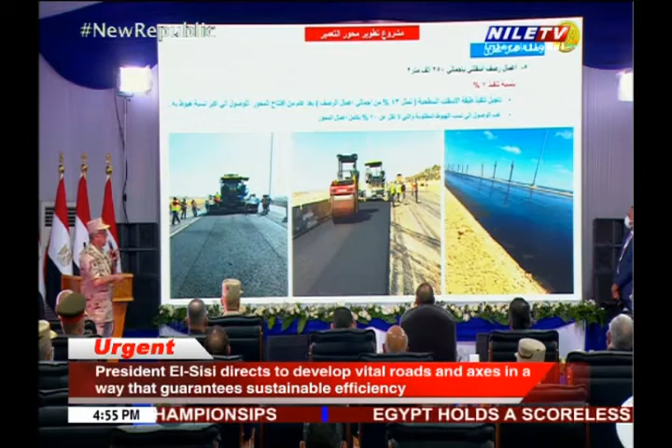For the pavement at a whole of 250,000 square meters, we'll execute 7%. Why only 7%? Because I'm postponing 43% of the surface layer as well as the second layer that is postponed till following the inauguration, one year and a half later.

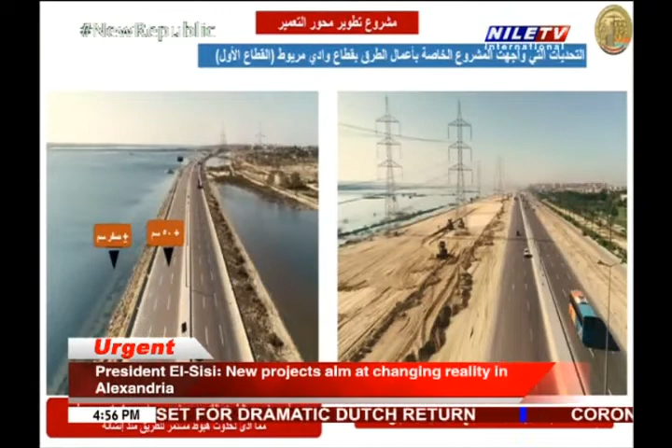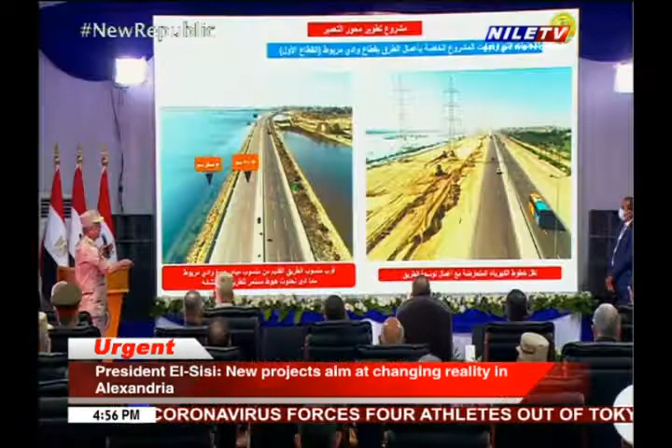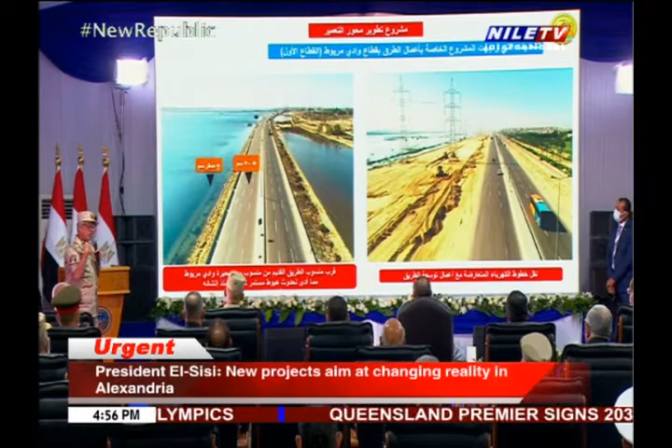50 centimeters of the water volume that would cause a landslide of a year. So each year would have the same problem, but today we've reached 9 lanes and above the surface of water to 3.5 meters, higher than the top of the water. The movement of the water would not affect the road at all.

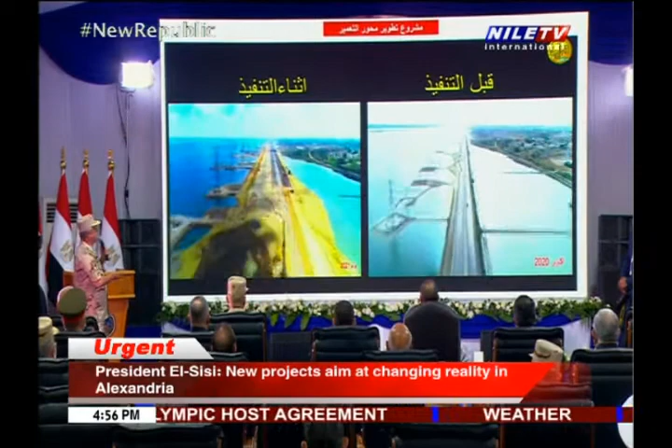Next, this is an execution status of October 2020. At the same time, in July 2021, we'll have 9 lanes each. That was postponed due to moving the electric towers.

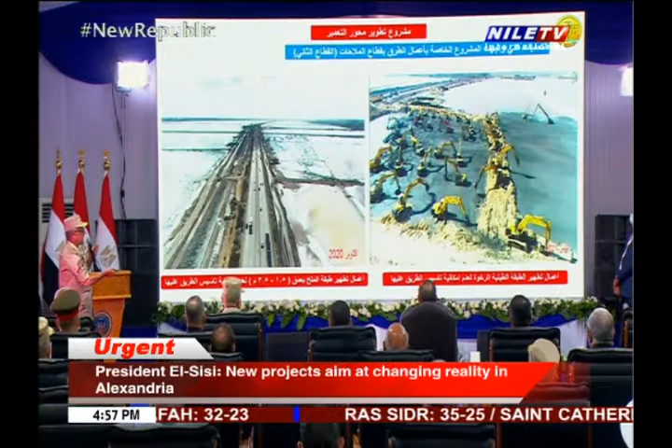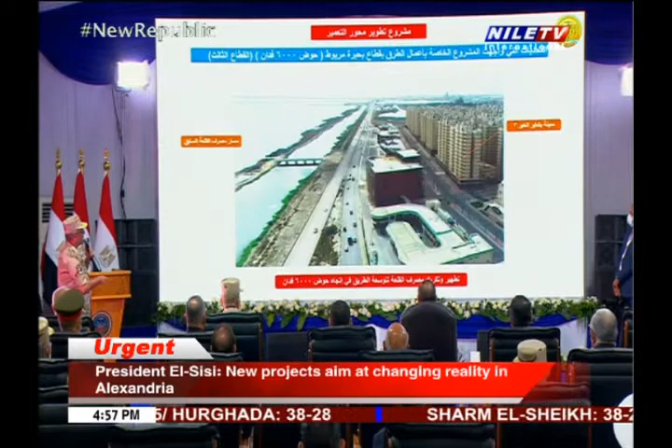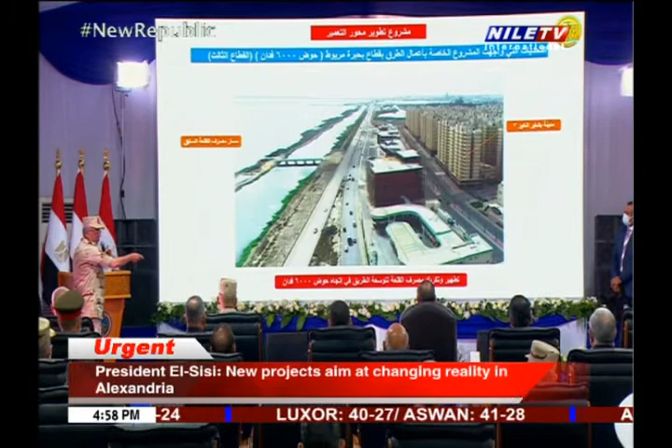We had the castle drainage that causes a great problem in Alexandria. We've already moved this drainage, 90% of execution, in order to expand the road in that direction, and we'll have the special road for the people to Alexandria.

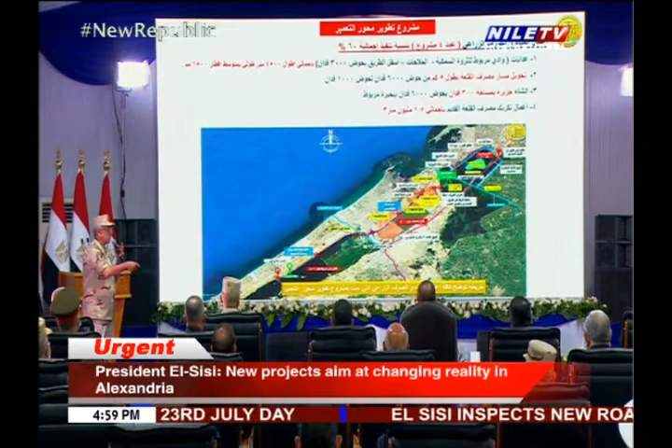We're working on 3,000 fedans of the basin, and we've coordinated with the fishery authority and the Ministry of Irrigation and all the relevant bodies to make, in the middle of the route, 300 fedans, because these works are on 20 meters multiplied by 100 meters of basin that are left for 6 months to be dried out, and then will be moved. In winter it will take more than that, 1 year, so that requires 1 to 1.5 years to move the production.

We've designed the land of 300 fedans, with the coordination of the relevant bodies. This would be a natural island for the fishery productions, and will have 20% of the water surface. That was a great idea to sort out a lot of problems.

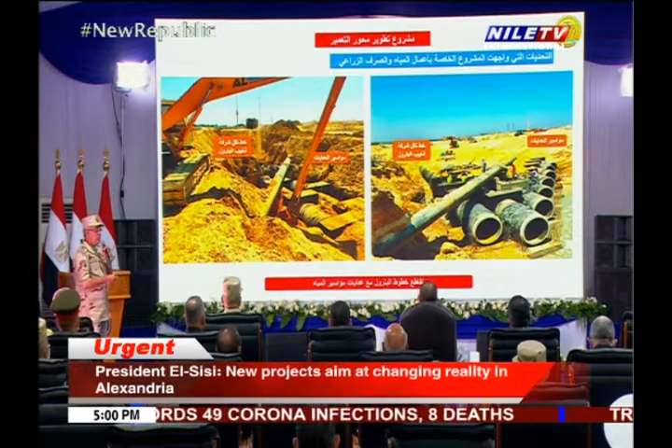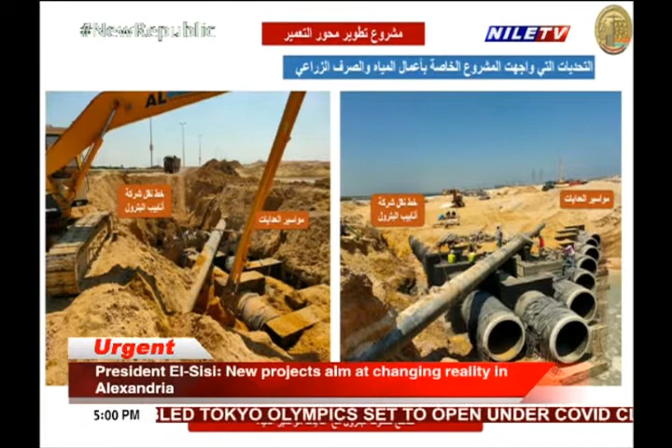We've worked on 1.5 million cubic meters. And the second challenge was the intersection of all the facilities, the pipelines. This is working, so I cannot deal with it alone, I cannot cancel, so I had to work in parallel.

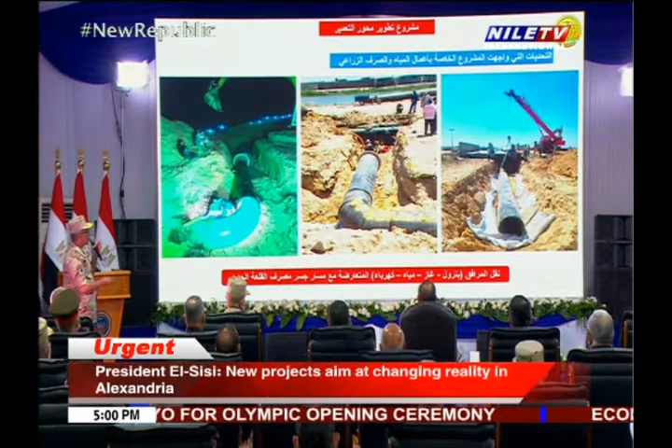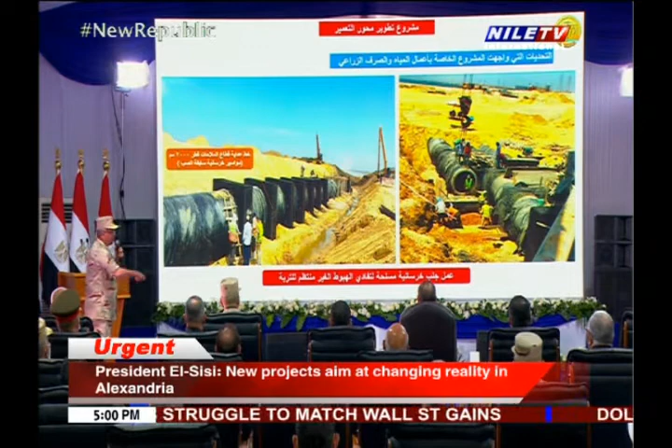As you can see in the other file, we supervised with the Ministry of Petroleum to secure it, and we had no problems till now. Next, the challenges of all the relevant authorities. Once we do the drainage by the cement pipes underneath the road, there are problems because the same soil could be derived or weakened, therefore the pipe could be broken.

We had to work with the consultant to make a site for the linkage of the pipes underneath it, as you can see, its bases to bear the load on top.

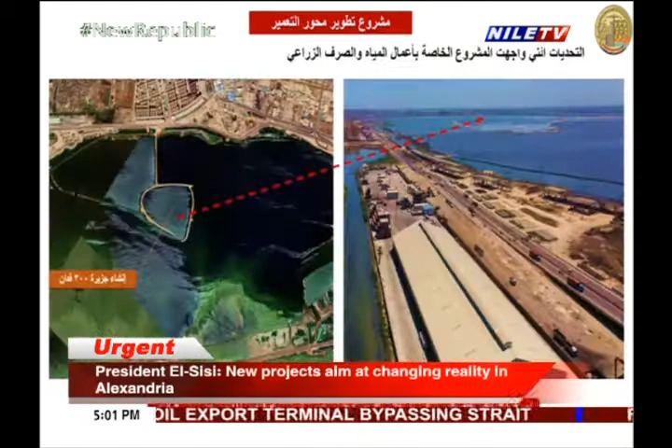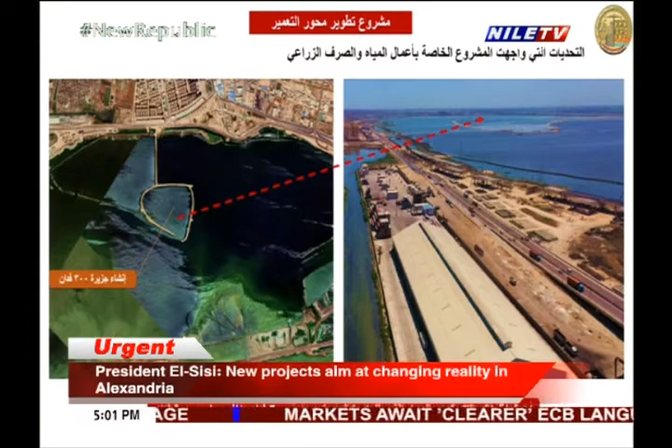Next, this is the challenge, the 6,000 basin. These are the drying up bases as directed, for the basin of 6,000. These basins were built over 1 year, so they cannot be moved because they are not dried out yet.

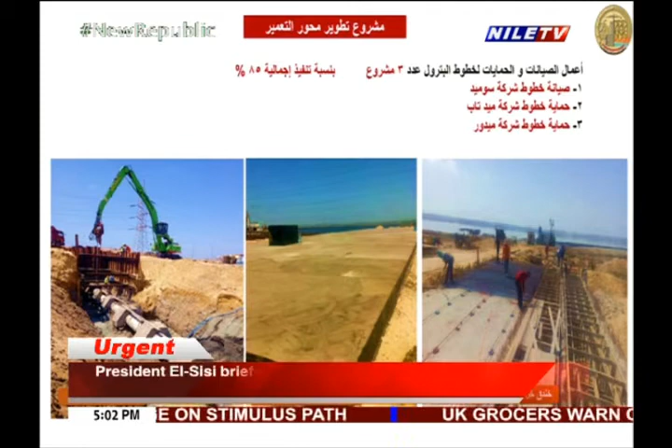Next, we've made maintenance of the pipelines, and as we work on one of the biggest and most dangerous facilities, we've already executed 85% by Meditab companies, and the rest is under their technical supervision.

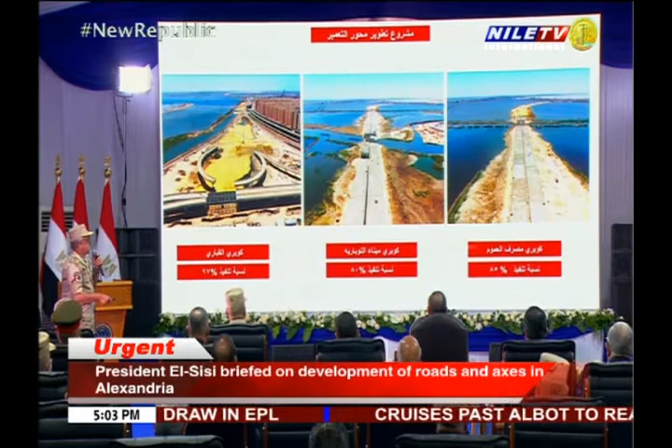These deepened bases are 24 to 40 in depth. 230 were executed. Next, as you can see, the forms of the bridges and their execution percentage.

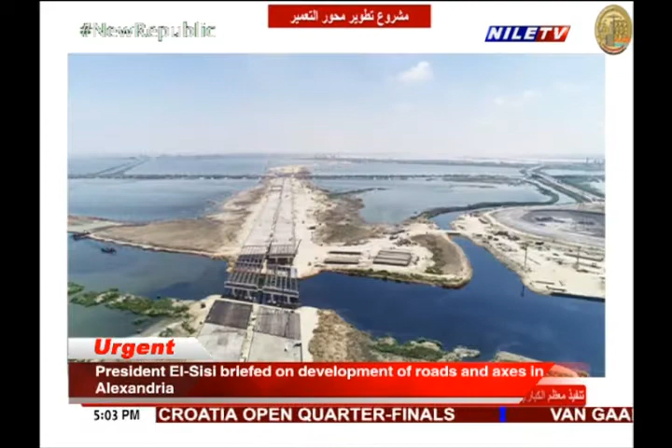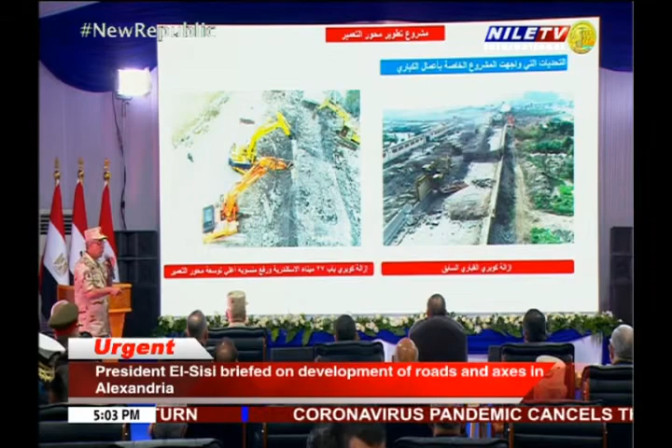Next, Ahmed, we've agreed that any drainage, to elevate its efficiency, should have the laying out on both sides. We had to remove the old bridges because it's not going to work with us in the Qabari bridge area that serves Gate 27 of the port.

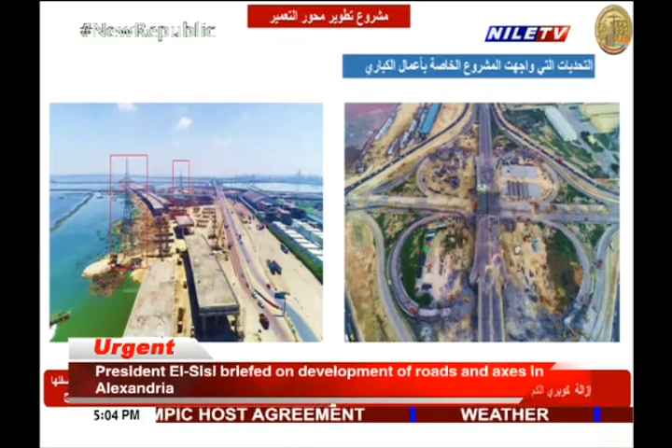And here, this is Al Qabari bridge and the Gate 27 bridge we've talked about. Next, the Km 21 bridge, to make three lanes and make it lines, we've already narrowed the bridges and made 4 and 4 lanes in directions to save time, money, and execution effort.

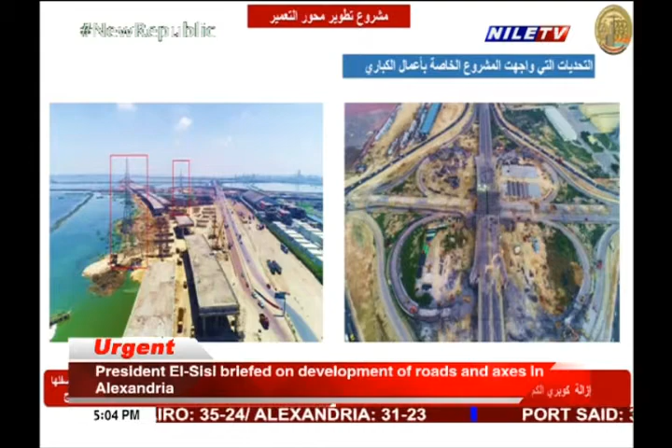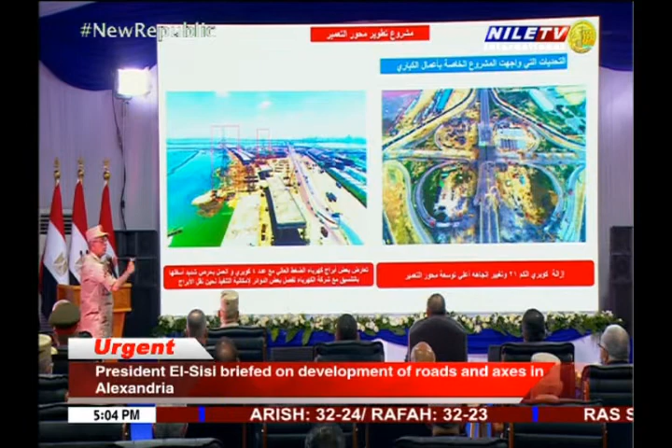So there is an intersection of the bridges with the electrical towers. As a team, since the electrical tower is existing, as you can see, I couldn't work here because of the high tension electrical towers, and of course the relevant body cooperated with us.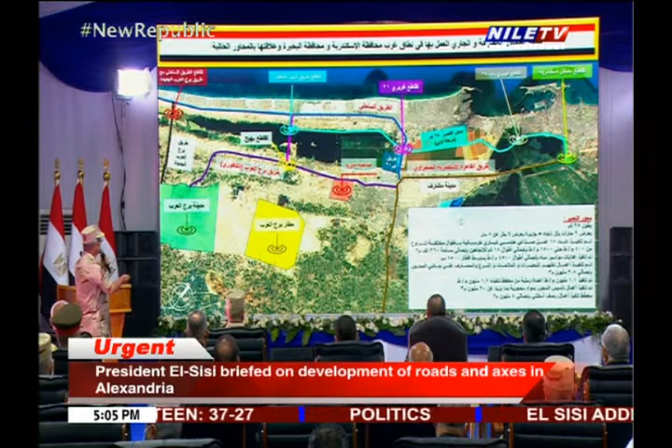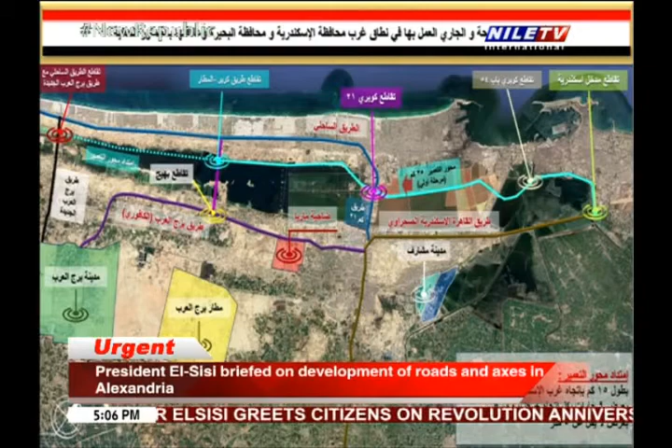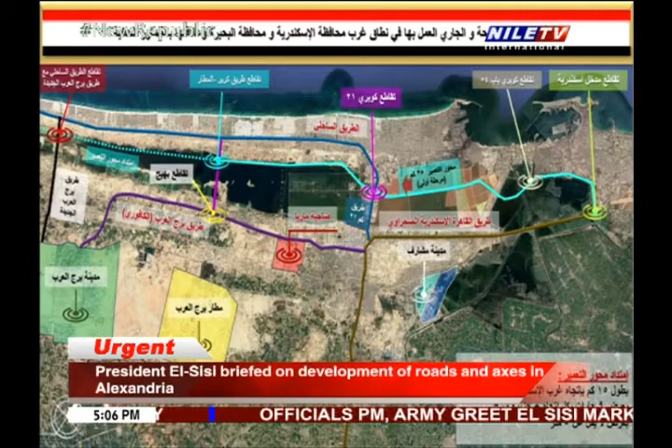Next, the axis would include 4 horizontal axes, with 6 engineering and industrial works of bridges of 18 kilometers length, and to execute the pipes and ferries to maintain the water there.

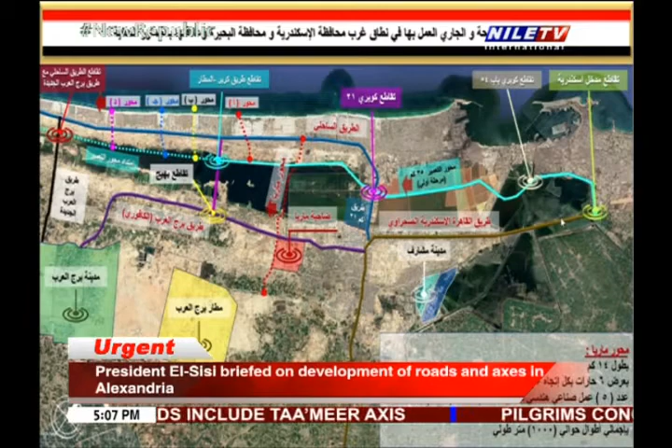Next, the Maryut axis, which is very important to link the coastal road of the international coastal road with the Burg Al Arab Al Kafuri road, crossing the electrical train to reach the western arrow at Burg Al Arab airport. It would include 6 lanes in each direction.

To execute the pipes of 1,000 meters in length. Next, the Maryut axis in short: this is the design and engineering works of 14 kilometers as a whole.

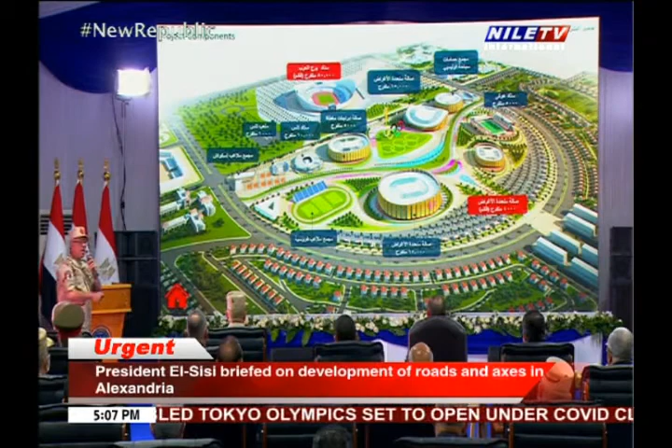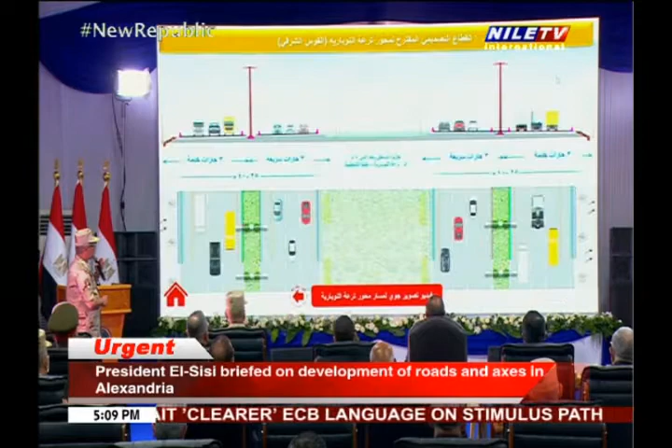As in the previous slide, about 300,000 cubic meters and the works of 25 kilometers, as well as the engineering works on the same path.

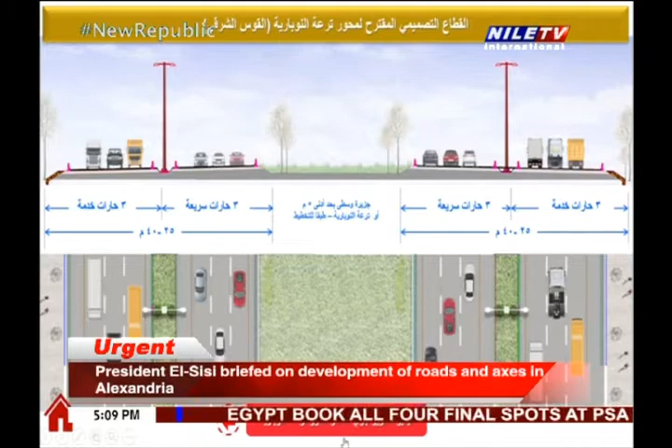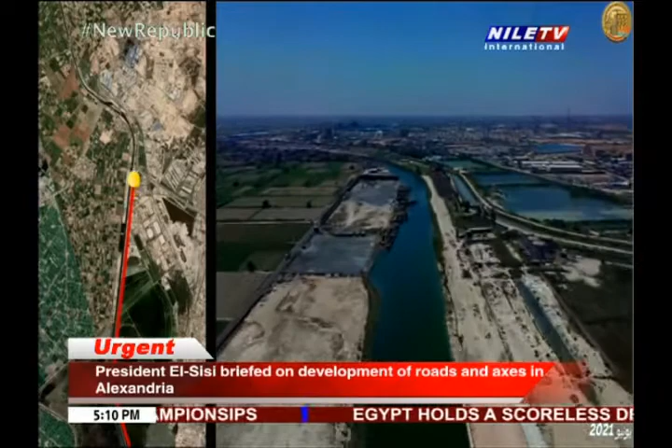I would like to say to Dr. Mohammed and Dr. Mustafa, when I enter such a lake, to make two sides and beautify it in order to save the mobility, following the effort exerted to serve a great amount of the agricultural land sector.

While we're working on this, the state apparatus will remove any trespassing at the bridge of the lake. We are talking about the undergoing road to be under the design insert. Is it going to be working on the right or the left? But we've decided to elevate the efficiency of this lake and its bridges, and to make access for passages.

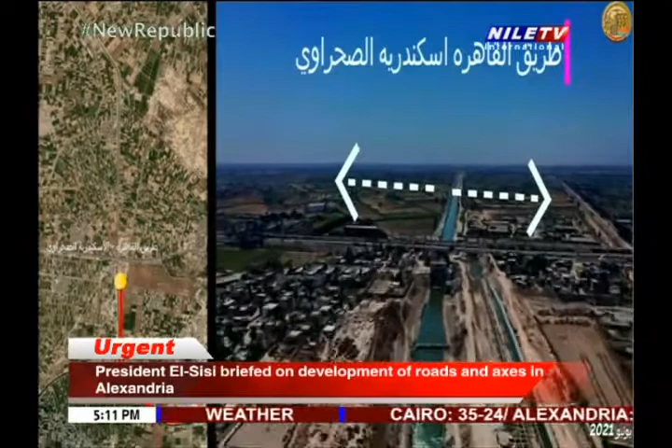Next, Al Nubariya Canal, as you can see, is along the desert road. As you take the path away from Al Nubariya Canal, as you can see, is the desert Alexandria road, to be at the end, taken from this point to be integrated to reach the Burj Al Arab zone, as well as the Burj Al Arab Stadium.

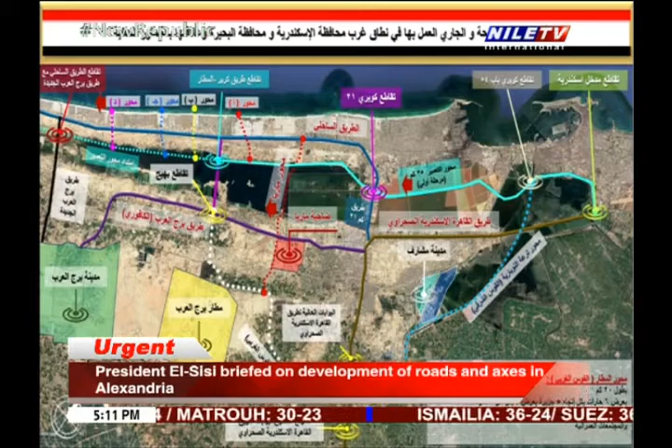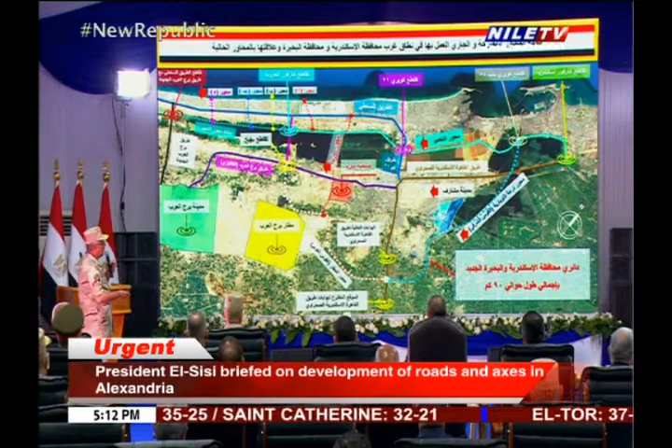This is to be executed and started by the Ministry of Housing, a 20 kilometer road. Then, taken in hand, another new road of 90 kilometers from Alexandria, or the old desert road, and the current road, will have 6 lanes in each direction. So it would be helpful for the development of the area.

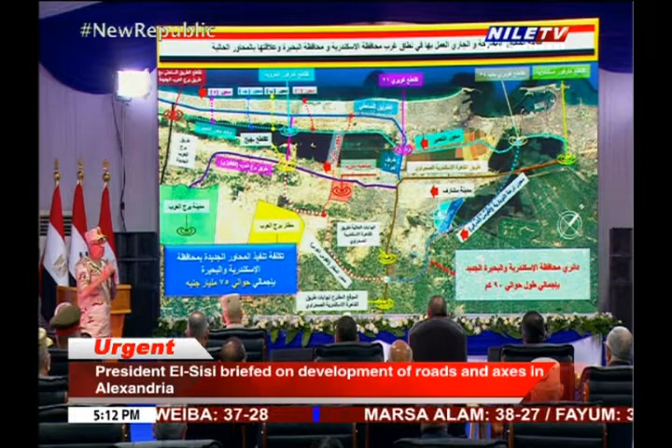Next, the cost of all this work is around 75 billion Egyptian pounds, of a total 140 kilometers, including the eastern...